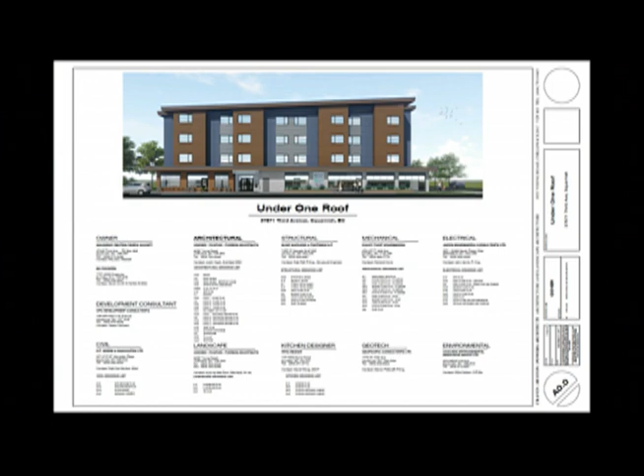Onto this site, there are related associated social services that these presenters will speak more to. Above that is social housing, ranging from core needs housing to transitional housing, and at the top is some affordable independent living. The site is being maximized to support and accommodate the proposed uses and the co-location of these social services, so there is no on-site parking on this project. However, the existing emergency shelter is kitty-corner to this site, and in the short term it's proposed that parking need will be met on that site.

There is a portion of the stormwater detention pond that's right at the corner and under part of the building footprint, so the plan is for that to be filled in, and that's being addressed through engineering. This is an institutional project, so it's not subject to a DP.

However, staff would like ADP comments. Due to the nature of this project, we are looking for comments that will result in improving the project, but hopefully not a significant cost increase. So finally, staff is seeking comments and not a formal recommendation today. And with that, I will pass it over.

As she described, we are maximizing the site. The proposed building is shown here in red, and this outline is the extent of our property. It is facing 3rd Ave, with the back facing the slough. The different shelter units face both front and back, so they have a view of the street and a view of the open water behind it. Main Street is to the north.

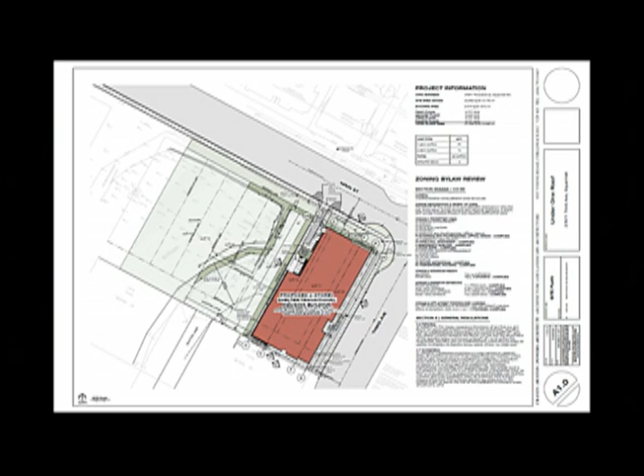To the rear of the site is the existing slough, and we're working with Civil to have them fill that in so we can develop on the first three portions of that lot.

The programming of the building: there's a food bank at the street corner, so they have pedestrian access, and the seating area can be used by the public as well.

There's a laundry facility which would include a donation center. There's indoor bicycle storage for the tenants as well as for staff, and there's a multi-purpose meeting space. All that is fronting the street.

To the rear of the building, facing the slough, there's a dining hall for the residents and for the public looking for food services.

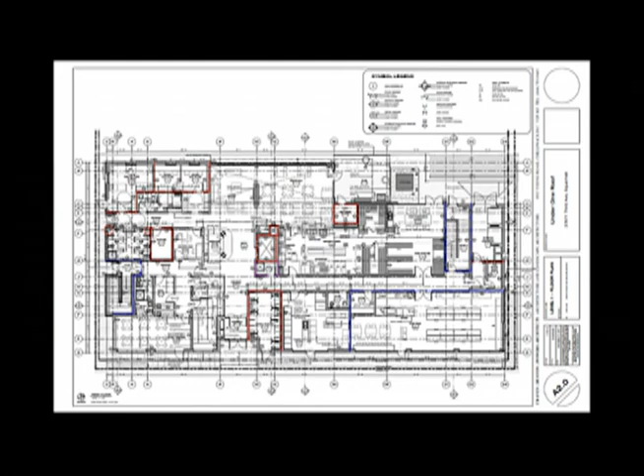On this floor as well is 8 beds for emergency shelter, and the upper stories are the transitional housing. So as people move up in the building, they're moving up in life, with different finishes and such going upwards.

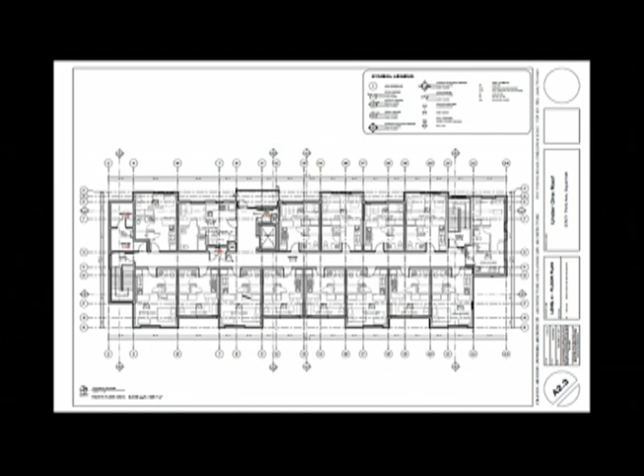Layout: it's mostly 1 beds, but there's also double occupancy suites with 2 beds, as well as handicap units.

For the elevations, the form and character of the building, we're using durable materials such as fiber cement and wood-look panels, architectural concrete, so it will withstand time. And with the wood look, it kind of speaks to the area as well.

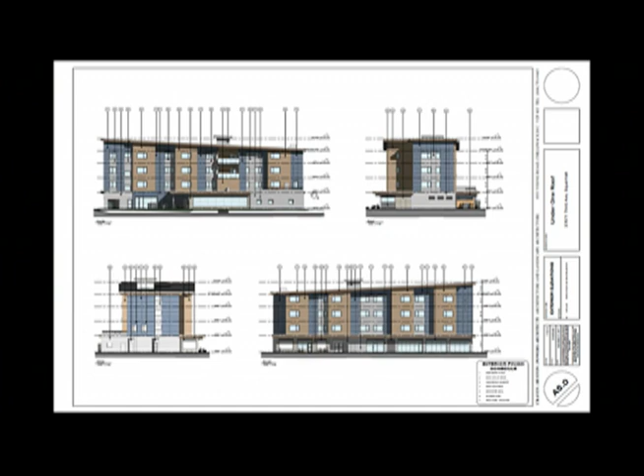For signage, we've included the main entrance with some corrugated metal signifying 'under one roof' and the food bank grocery. There will also be signage showing the different donors and partners involved in this project.

The ground floor is all concrete as well, just because of the commercial and mercantile nature of it. So it's a concrete first floor and three stories of wood frame above. That's it.

Some of the other things we tried: that concrete plinth needs a 2-hour separation to the floors above, so we did play with vaulting it on the back, but both for economy and fire rating, it needs to remain flat as we're showing there.

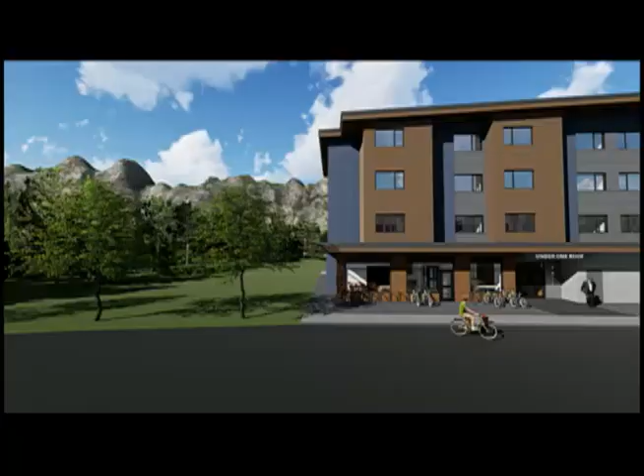There's cast-in-place concrete on the front here, architectural cast-in-place in light gray, and other parts of that concrete we're facing with faux wood cement board. In the rear of the building, there are also outdoor patios for the residents and a patio to the side for the staff.

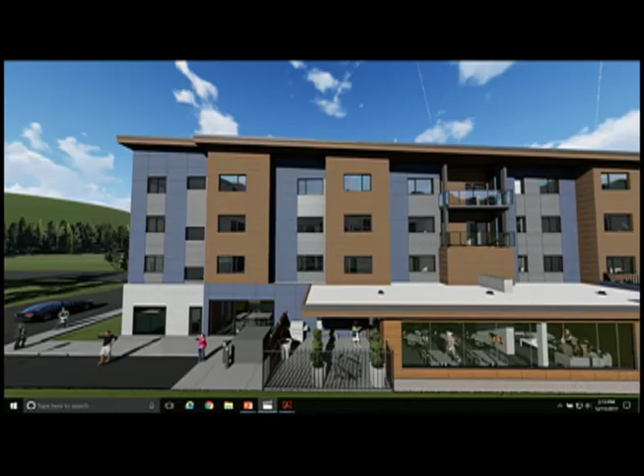Yes, that's a view to the back there. We have an unfortunate location for a transformer, but we're pretty pressed on where it can go. To the left, we just passed the outdoor patio facing south onto the beautiful water feature behind us.

We've been moving fast on this, progressing working drawings along. As you can see, this is a working drawing set. We are at a good point and really happy to hear comments and feedback. We're starting to fine-tune the exterior of this building, so we'll open it up to comments and any suggestions, and we're here to answer any questions.

Do you have a landscape consultant? Yeah, we do. We're going to bring Kyung, our landscape architect, along, but since the entire site is a building, the amount of landscape is quite limited. On the north side, we've been working with Cascadia for the environmental riparian area - everything north of this assumed property line is riparian replanting. They are allowing us to do some planter boxes within that, calling it agricultural within the replanting plan, so there's a crushed rock path and some planter boxes back there. The remainder - just the front corner - is really all we have left to work with for plants, to populate that front corner.

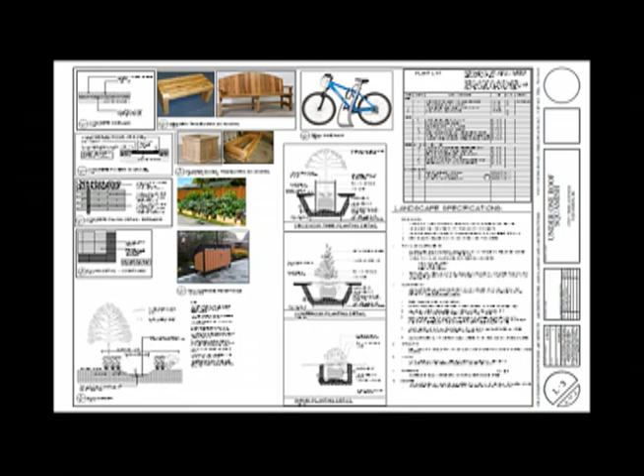Last question - is there a sign permit required for the signage being proposed? Yeah, we do sign permits, usually at the point when the project is ready for signage. Thank you. Okay, Cheryl? No questions.

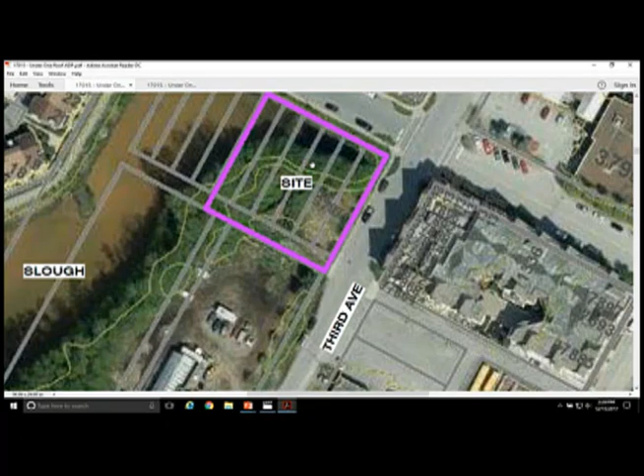What was in the site plan, what was the restriction on your property? It looks like you've chewed into some of those sliver lots there. Was it size-wise and height-wise, what was the limiting factor on how much property we could use? It looks like you're just filling in, so why not? For the zoning? No, because the city owns all those properties, right?

Right, yeah, it was the riparian trade-off - the amount of land needed to swap for the slough being filled in, that kind of dictated how much had to be... I guess not dedicated, it's the city's property, and that's what established our property line there. We did, because we're so limited on outdoor space, ask our environmental consultant how much we could sneak towards the slough and make use of that. But basically, the more we go in that direction, the stiffer we are on other land that needs to be traded off. So that line was provided to us as kind of our faux property line to work on.

If I may add to that - the portion being filled in is mostly a stormwater pond, it's like a two-step stormwater management system. So if you go by there, it's actually the black water pond that's being filled in, and there's going to be some infrastructure that goes into it to maintain and improve the stormwater management function. Okay.

That's all my questions.

Curious about staff parking, is that expected to be on the street? In front of the building, for the most part, staff is expected to bicycle. It's on the street, kitty-corner on the existing Helping Hands property where there are existing parking stalls. Once they move over here, that's where staff and visitors and such will go.

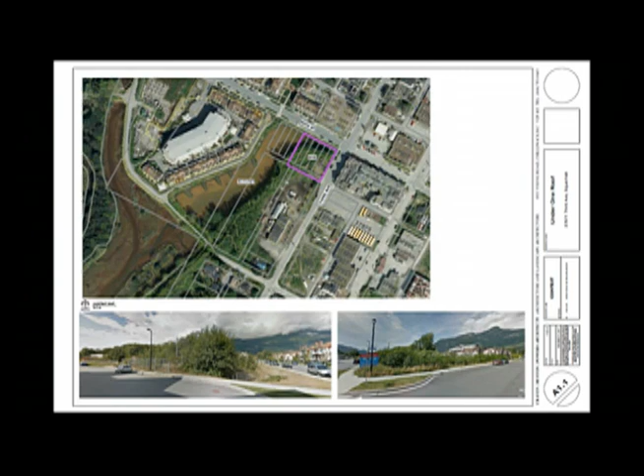And the riparian area to the west, I guess, because there's a bit of a wedge of land there, you're filling in on the corner, but there's quite a bit of land to the west. Is that all a no-touch zone, just based on the calculation, no trade-offs about that? Yeah, I mean, I think it's a trade-off, both land and quality of plantings and such. So we've pushed to head in that direction, and the line was kind of set for us. Yep, okay.

And there are no street trees on Third. Why is that? We're still resolving Third Avenue a little bit, so the plan in the active transportation plan is to have a separated bike lane that goes the full length of Third Avenue. The building is set back about 1.5 or 1.8 meters from the property line, and because we haven't yet installed this separated bike lane, we're still figuring out how it's going to work with existing buildings and new buildings and all the rest of it.

When the street design is figured out, would the city come back and include street trees if that was part of the overall design? No, I think we're going to try to figure that out as part of this process. Okay, that's it for me.

What's happening with the existing Helping Hands property? Does that stay owned by the district? And is that staying that use, short term? It's staying, the ownership is going to stay the same. The use in terms of immediate future will be for accommodating parking on that site for the new development, and we're not sure what's happening with that afterwards.

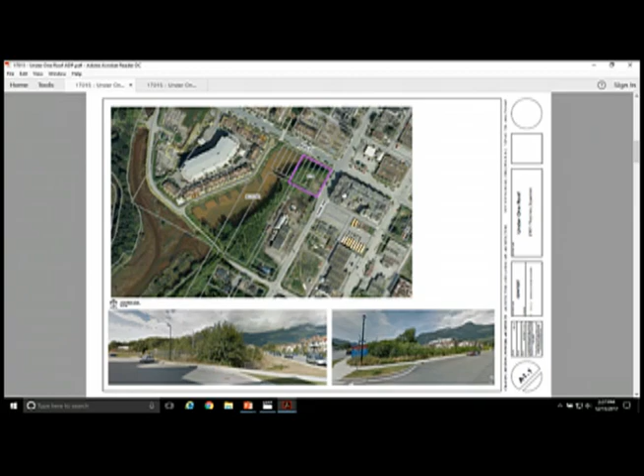Can you clarify for me which elevation is the Main Street elevation? The directions are a bit confusing for me. Is it the north east? Sorry, Main Street is this side. The bottom right here? No, that's Third. Oh, I'm sorry, Main Street, north and south. It's going to be that one, two labeled. So the long one's Third Ave. I want the short one, the one with the signage. It's this one, yeah. Okay, so that's Main Street there.

Because we don't have circulation, that is our loading, our garbage, which we've added some windows to articulate a little bit. And that'll be landscaped, so it won't be an exposed concrete wall. Okay, like was kind of shown in the 3D. Yeah, that's a better approach, yeah.

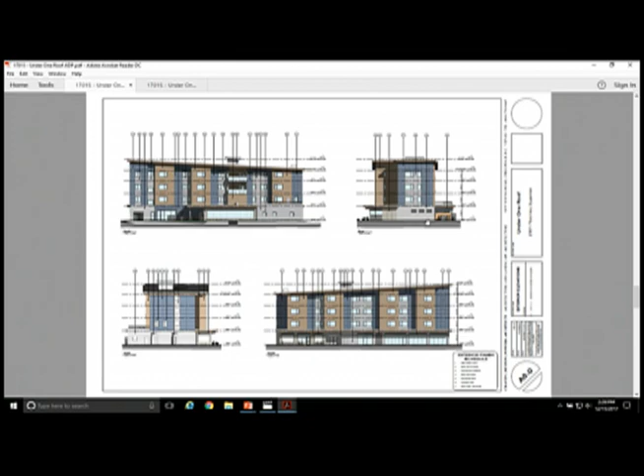Okay, that's it for me. Okay.

Just carry into comments. Sarah, do you have any comments? I'm pleased to see that there's accessible units on each floor. Thank you very much. Sorry, I just didn't hear what you said. Oh, I just said thank you to them for showing accessible units on each floor.

My comments are really just around the kitchen on the 4th floor accessible apartment. You should have a cooktop that can be used under, the sink should be able to be used under, a wall oven for the accessible unit for sure. Fridge with the freezer on the bottom, make sure the controls are at 1200 millimeters above the floor. Otherwise it looks great.

Also the countertop serving the cafe, if it can be at table height rather than counter height, so that it's easier to get along with it. Yeah, so the serving window. Beautiful, that's it, thanks.

Thanks. Just one comment, and that's just, I think you've done a really good job making the building look nice given the budget constraints and all of the programming you have put on the ground floor. So I'm glad to see this project moving forward, and I don't really have any comments on the design again.

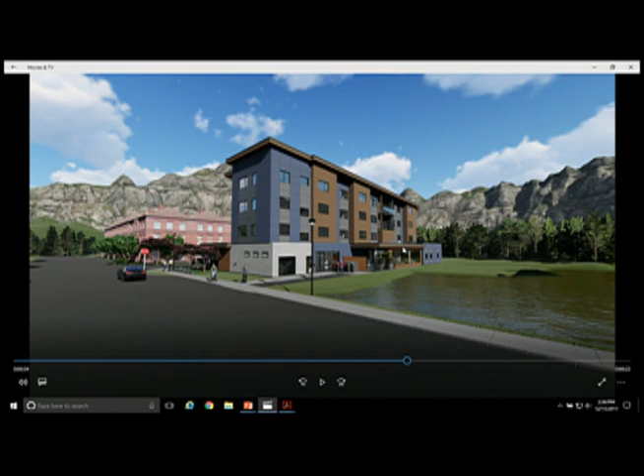For a limited budget, I think it's good. I like how much glazing you have on the main floor - as Wayne said, it opens it up and invites the public in. I don't know what other changes you could make that would make a big difference within the budget you'd have to work with.

I do agree with Cheryl - maybe some of these lower roofs could become outdoor space, and then you don't have to utilize a north-facing patio. But overall, I think it's fine.

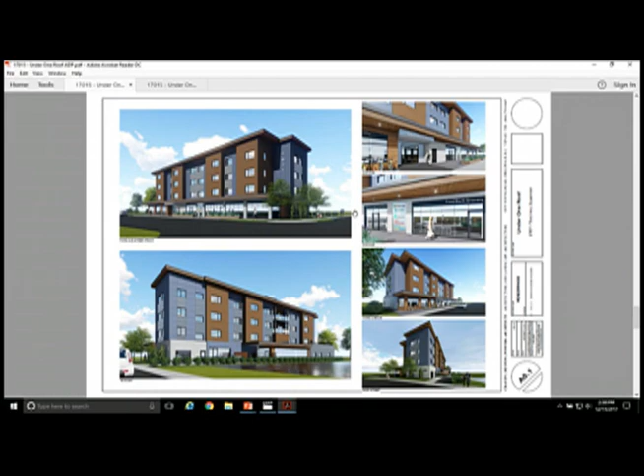My comment might just be on that east wall - a little more treatment, because that's going to be the key end wall everyone sees driving down 3rd. There was also a comment on activating the kitchen or eating area in the front corner. It might be nice to have a garage door that opens up and animates that street corner, or possibly double doors - I only see single doors along that whole frontage. Maybe there's double doors or garage doors that open right up in the summer.

Maybe out of the cafe, to be able to open up. You're talking about the left side of the food bank where there's a cafe eating area? Yeah, yeah, it's funky. Those are my two comments.

I think where I'd usually focus on added commercial viability of a building, you already know exactly what you need to do in this space and you're taking care of it exactly the way it needs to work. All I can say is how excited I am to see this come to the community, and what a great location for it too. Everything else about it looks pretty fantastic to me.

I would agree totally with John. I hope to see this move forward - it's nice that the district is helping make this happen quickly, as I know a lot of these spaces and services are very much needed here. Overall the form has been executed very well given the limited budget constraints you're dealing with. If there's anything for me to suggest, the comment about garage doors is a really good one for increasing interaction between the street and making it visible for people inside and vice versa. And if there's any chance of increasing the size of the glazing, even breaking it up somewhat, because natural light is so important for people's well-being, especially given that for a long period of time in Squamish we lack it.

Okay, so this is DP 473. We're right on the edge of the Northyards neighborhood. Very briefly, this whole block was zoned RS3 and RS2, and then the district did a mixed-use rezoning to create the MUD 1 zone, and that was this year. So this is the first of several developments we'll likely be seeing in the coming years for this block. And I just wanted to point out that there are 3 variances.

They're all quite minor in the eyes of staff. The first one is to increase height, basically to allow for this entry tower that goes up the length of the building and the butterfly roof design, and staff are supportive of that variance. The second variance is a very small side setback due to a slight encroachment for the parkade. The third variance is to reduce the off-street loading from 3 spaces down to 1 space, and again that's supported by staff. We feel there'll be shared loading and that the office is likely to have low demand on the loading space.

So just to summarize, in the eyes of staff, they're meeting all of the DP guidelines, the DP Area 6 industrial park guidelines, so staff's conclusion is that these have been met. We are looking for ADP's comments in relation to the site plan, accessibility, circulation and layout, as well as the architectural design, form and massing and articulation, the materials, and the landscape plan. So I'll pass it along to the architect to present in more detail.

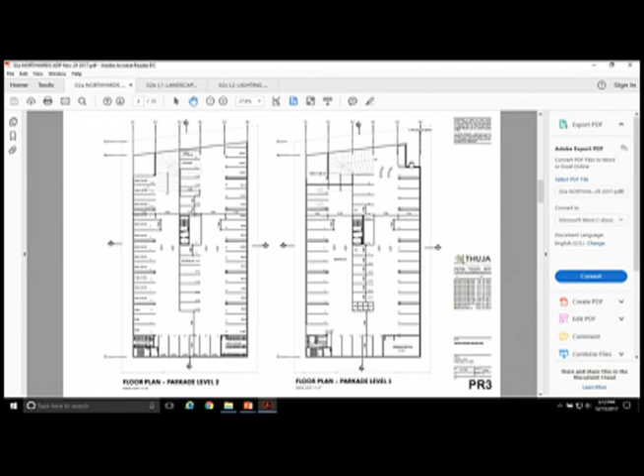We've provided a mix of studio to 2-bedroom units, each with private decks. The 5th floor units are a little bit smaller. They pull it back to have the upper floor, the 5th level, step back, so it's not a heavy building, and that also allows for some potted landscape up on that top floor.

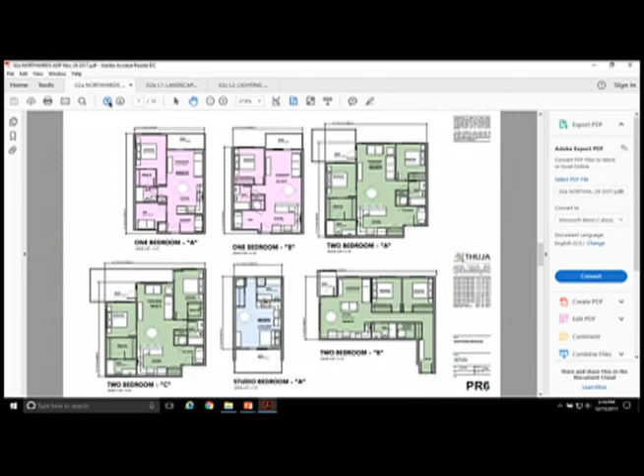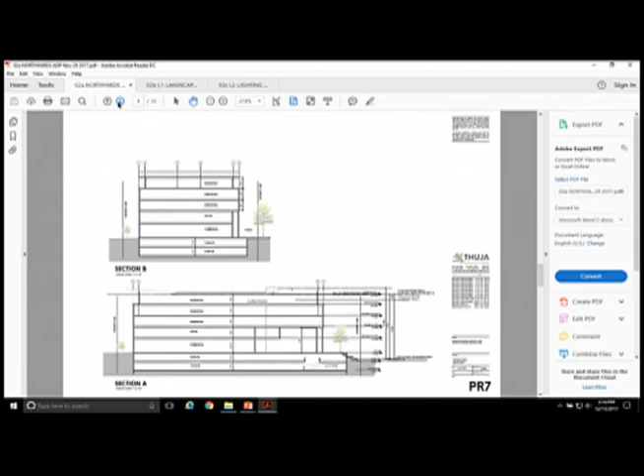So the south and west portions of the building are pushed right to the setbacks. If you scroll back to the main floor here, envision how these would set up for tenants, they're exiting out the backs of these units. So this space doesn't set up for heavy glazing, it's more of a utility type of space in the back of these units, with exiting along the back. We also have a separation with our lot line, we can only have a certain amount of glazing, so we're maximizing glazing in the office space, and then we don't see a need for heavy glazing along those 2 facades.

Some renderings of the project. So the stairs coming up are quite a challenge, if you can imagine trying to stair and ramp up almost a full story in such a short width of land. We were trying to push our stairs out towards Government Road and sort of grab pedestrians coming along. There'll be new sidewalks and things, so it's going to change the look of that street. We wanted it to be not just a switchback of stairs up to this commercial area, we wanted it to be a place where people could hang out. There's going to be landscape planters and benches amongst those stairs and ramps, so people can sit there and have their coffee, what have you.

And then the same happening in this common courtyard area. People can put their benches or their wares, tables out depending on the tenants we're going to have. And then we have these built-in concrete benches amongst planting areas, which Laura Lynn can speak to.

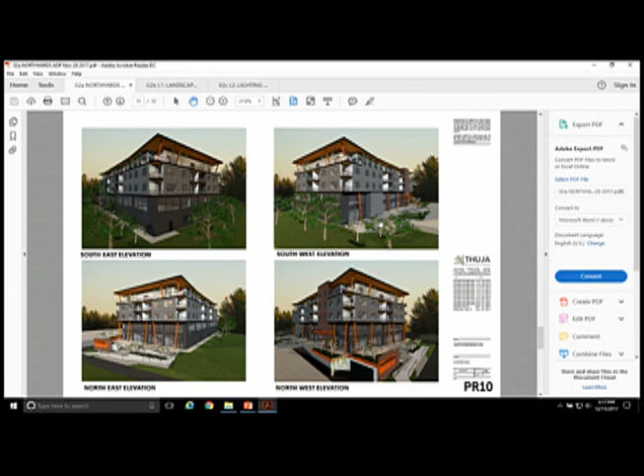We did a quick shadow study, pointing out that in high usage times of day—lunchtime and the end of the workday—those two plazas are getting sunlight. In the middle of the day, and then at the end of the day on those steps, they'll be an interesting place to hang out.

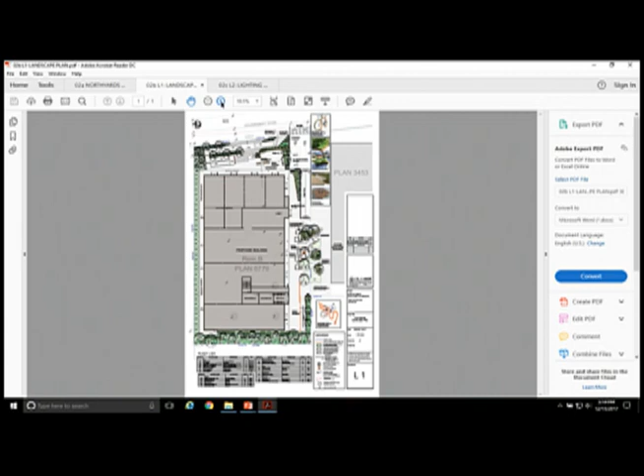So my name is Laurelyn Swizzo. I'm the landscape architect for this project. Some of you might know me—I worked in Whistler for one of your local landscape architects, Tom Barrett, for 15 years or so, and have recently moved further north, so I wasn't able to be there, but thanks for letting me call in.

I guess she sort of touched on some of the landscape already. I'm sure you guys will have a couple questions, but maybe I'll just do a quick summary.

So we've got the front entry, where we've got quite a series of ramps and stairs, and I'm fitting in some tiers of landscape areas. It's going to be quite shady over there, so lots of native ferns and shade-loving plants, as well as much evergreen material as I can to keep it green most of the year if possible. Some smaller deciduous trees out front, and I think I'll add some nice flowers in the spring and summer.

Did you have a plant photo board, a picture board there? Yeah, so you can kind of refer to some of those pictures to get an idea of the plant material.

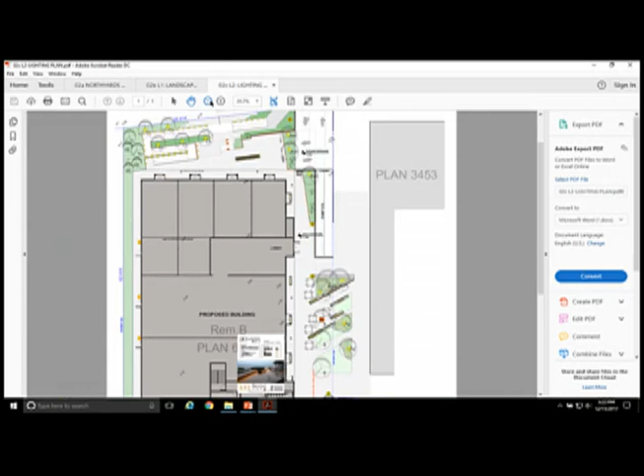And we've got a bunch of bench-type seats in there, and we've tried to add some creative lighting so that in the time of year where you don't get as much sun, it's still an inviting place. There's lots of opportunity for movable furniture, or if you don't have furniture, there's still lots of opportunities for seating.

We've got quite a few bike racks because Squamish is bike central, so we've got some at the very back, but still quite visible to the whole plaza, so I don't think it's going to be a problem putting your bike there and worrying about somebody snatching it. And then up front we've got a couple more bike racks in the front little plaza—but if you're just stopping quickly, maybe you just want to keep your bike there and run into the shop.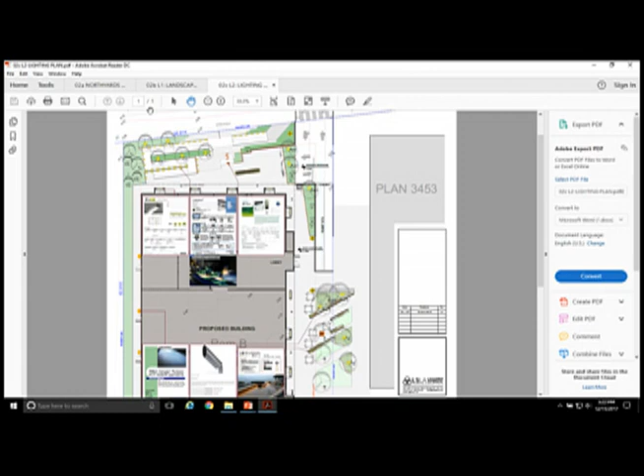The back area, we've got quite a drop right now if we look from the level of the plaza down to the existing grade, but as I understand, this may be coming up with other developments possibly to the south, so that area might end up getting filled in. But in case that doesn't happen, we've got a nice buffer of native-like plants, some trees to help shade the building in the summer, and then they'll lose their leaves and help warm the building in the winter.

And we kept a buffer on the west side as well, so that would be below the railing and walkway. It's an evergreen shrub that gets up about 2-3 meters or so, and I think that'll be nice screening for that side of the building.

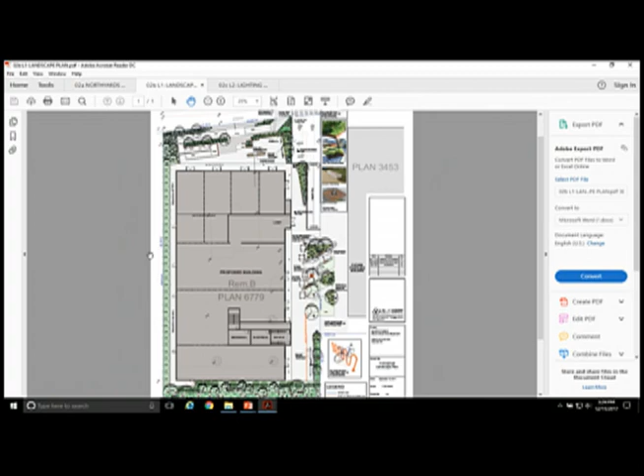Thanks, Laura, we'll do questions in a bit. If I may add to the presentation, since the district drove the zoning earlier this year, I want to give the ADP context on the overall set of properties. The MUD 1 zone uses a three-tier approach, going quite industrial with some residential at the south end near Pioneer Way, then more light industrial, then more neighborhood commercial at the north end. This side is along Government Road, so the focus there is more commercial and office rather than light industrial.

Okay, thank you, we'll start with questions. I can start. Thanks for the presentation, Dennis. Do you have a traffic study on this area? We did, yes, it was required by the district.

I noticed all the photos are kind of old. There's been some recent road upgrades the district did, active transportation in that area. Was that considered in the traffic study? Yeah, okay.

What considerations have been made for the neighboring property that's a dog kennel or dog training facility? It's noisy, and the train is noisy as well. Is there anything special? I can speak to that - that site's been purchased by a developer and is in the process of coming forward with a very similar development. Okay, and what about the train? There are many properties around here that complain constantly about the train.

I can speak to that, because I was involved in this rezoning process. The property closest to the train tracks has zoning requirements for certain design features along that western property line, such as thicker windows and other considerations. But it doesn't extend past that first property. Okay, unfortunate.

And then just the parking count - it looks like you meet parking, but there's quite a consideration on motorcycle parking, there's 6 of 12. Can you explain that? It looks like you meet it, but there's a lot of motorcycle parking - it's like half. Maybe Asia can speak to that. Yeah, our zoning bylaw does allow motorcycle parking spaces to count as car parking stalls, so 2 motorcycle spaces equivalent to, I think, up to 5%. There is a limit, obviously. Yes, so they're at that limit.

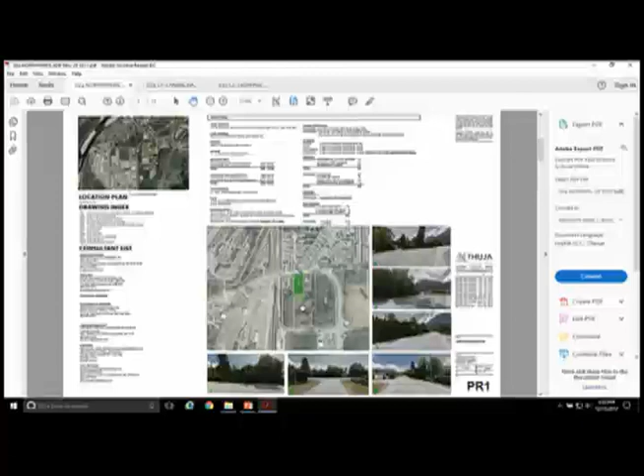Building on that, between the two sites currently actively developing, we're trying to coordinate, and their architects are working together to put some pedestrian connectivity between the two properties. They are talking to each other to try to design and facilitate that connection, and staff is trying to facilitate that too. So we're working with what we have in the current situation. The largest property, the one in the middle, and the adjacent one are both owned by the same owner, and they're trying to consolidate to create a larger parcel that's more in line. Hopefully if that has a positive outcome, it will add to it as well.

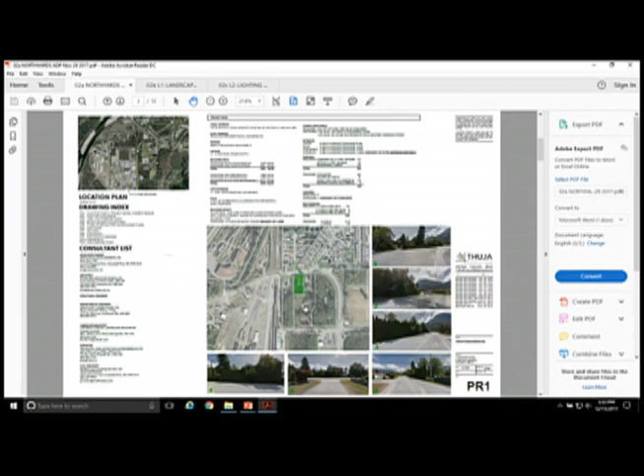Maybe to staff, if second floor commercial doesn't survive, can they convert that second floor to residential? That's a good theoretical question. I think we'd have to revisit that if that's the case, but at this point, the zoning would require non-residential uses.

Has the applicant considered a shared ramp to the adjoining property down the parking garage ramp? Yes, the developer also owns this property here, and this will be a shared access between these two properties.

The decks aren't shown in the building sections, correct? No.

On the upper deck facing north, you show trees. What provisions will be in the building to have those trees there? Maybe Laura Lynn can speak to that. That upper floor terrace facing north, what provisions are there for the trees shown in the architectural but not shown on landscape? I think obviously structural will have to take the load of soil up there, but I see it being raised planters, maybe 1.2 meters square, and then have something smaller, probably a flowering crab apple or a variety without fruit so it doesn't make a mess, or possibly a small pine in those raised planters. That would probably be the solution if they want larger material up there.

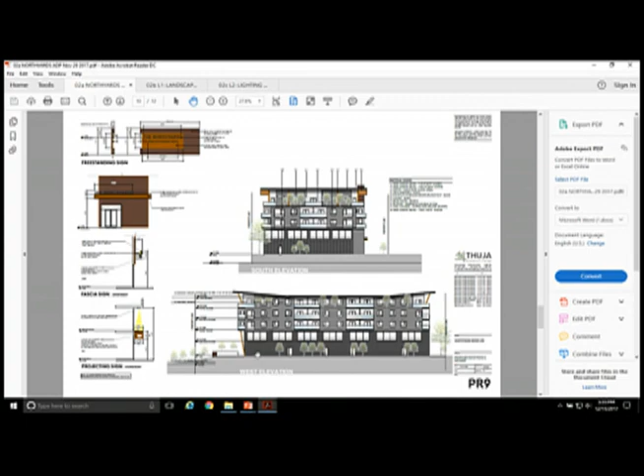Is there a street tree, or is there intention at the municipal level for a street tree for that road? I'm not showing any street trees at the street level, but I do have a dogwood tree, and because there are actually two tiers, if you refer to my plan, I think that will give a nice effect because the sidewalk is so close to the ramp, along that part of the street. I can look at putting another tree on the east side—I've got space for another small tree, but they would have to be smaller scale trees along there.

I like the beginning of the ramp and the stair system, but that kind of falls apart at the top. Did you ever explore continuing the ramp to the east on the top leg so that those using the ramp don't get dumped out in the corner there, but maybe are closer to the entry and the larger space in the front plaza?

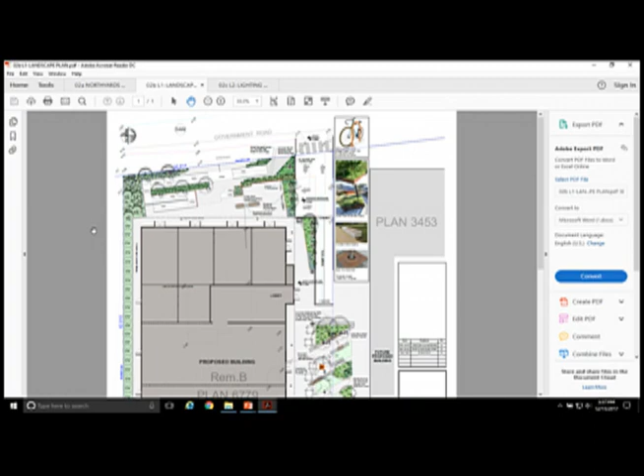Kenneth, do you want to speak to how you're stepping up or down the parkade to accommodate the ramp? The parkade goes to the property line, so it's under that upper plaza. With the district, anything over 4 feet has to be behind that setback line. So as the stairs and ramp go up, our parkade ramps down, creating a height restriction. We could change the ramp to a straight dog-leg back and forth, but we wanted to create something more usable instead of just a boring ramp beside the building. No, I agree.

Laura Lynn, there's one plant on your plant list, TM, on the plan that's not on the plant list. Is that Mertensiana? Yeah, the mountain hemlock. Glad to see somebody else does that too. Okay, that's the end of my question.

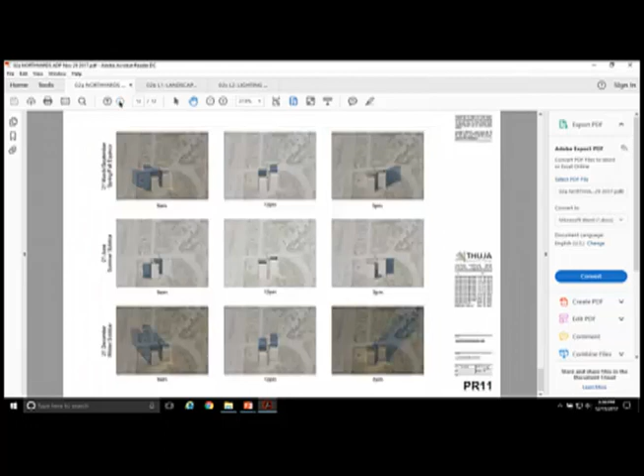In the shadow study, there are 2 buildings. What's the second building? The second building is owned by this developer, who will be developing the adjacent property as well. So we've just flipped a similar building to look at adjacency and how that courtyard will receive sunlight, just to give a comparable. Is it the intent to do a duplicate building, design-wise, size-wise? I don't know if that's really set right now.

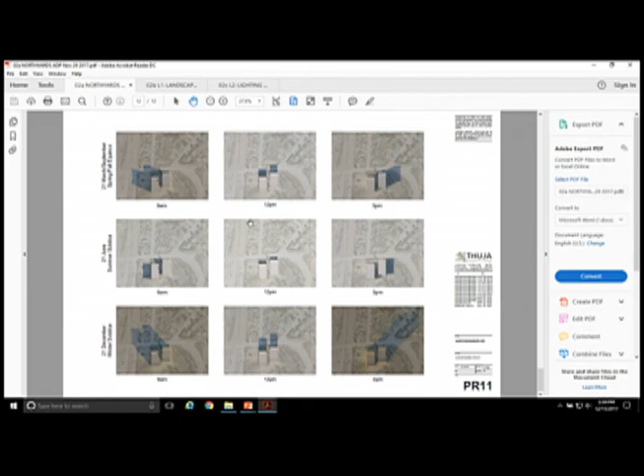Is it a wood frame building on top of? There's definitely going to be some steel on the main floor, but wood up. And are those weathering steel columns structural, are you thinking, or are they? We hope to, but we can span before that span, so they don't need to be structural.

Can you clarify, I'm a little familiar with the zoning, but maybe for everyone else, the height increase of that over-height shed roof and how that relates to the bylaws? Yep, I can speak to that. The allowable height is actually 16 meters, and if they're able to do a higher energy efficiency construction, they get a height density bonus of 1.5 meters for anything within the floodplain, so 16 meters becomes 17.5 meters. There's a different height bonus the developer did aim for tied to the provision of over-height industrial bays, but that wasn't obtained—that's part of the MUD 1 zoning, and it's not what's being put into place in this development, so they weren't able to qualify for that additional height bonus. So from 17.5 to 19.23, am I reading that wrong? To the 23.7 meter? Oh, that's overall, geodetic, sorry. No, that's okay, I just missed the dimension.

I like the treatment of the west side where you've got some brick. Where is it? Yeah, sorry, the northwest elevation, which is the west. The east elevation, sorry, there. You've got brick and it speaks to the sign that you got in the front on the north, but then there is no—most people would be seeing that road frontage along with Government.

So a way to pick up some brick on your sign that you've obviously got on the east elevation, to bring it onto the north elevation as well, that everyone is going to see. So you add more brick onto this elevation? Yeah, it looks like you've added brick to bring in the sign on that east elevation, the ability to bring it on the north elevation as well. So we have the sign at road here, which is brick, but we wanted to define the residential entry in a different material.

And street frontage hasn't been sorted out with the district, like the bike lane, 3-meter bike lane? There'll be a separated bike lane along there. I'm not 100% sure of the frontage, but our engineers have communicated with the applicant's engineer too.

That's all my comments. John? Where do I start? I'm going to make a comment, but I'm hoping my colleagues here will take it to a next level. Just the street front—to me the massing over the street, in consideration with the neighborhood nearby, I find it really heavy. I would prefer to see some setback and articulation there so that more light can come through and so it's not so looming over the street. The north elevation? Yeah, it is set back quite a ways. Yeah, floor to floor as you go up the building.

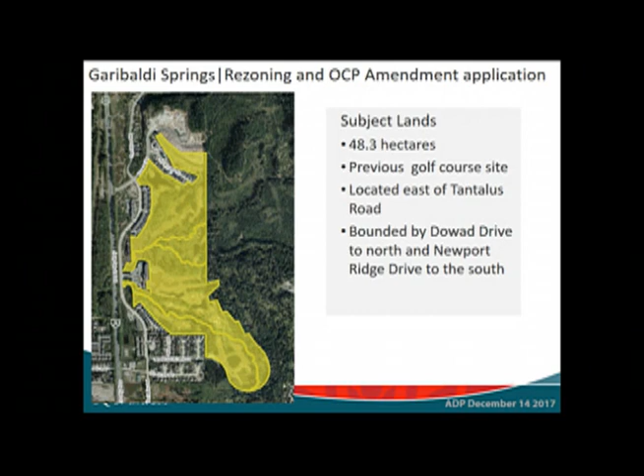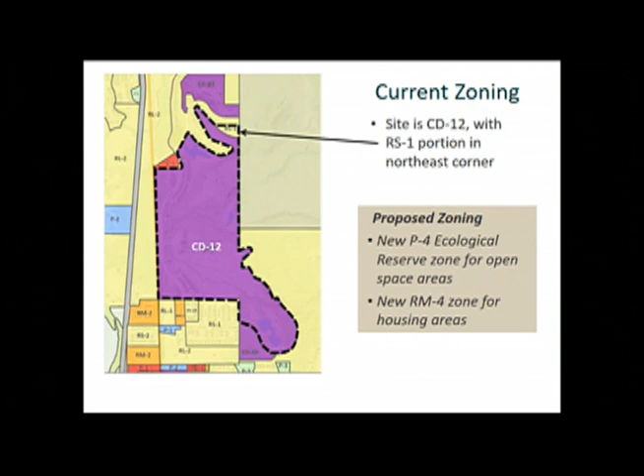It's a 48-hectare previous golf course site on Tantalus Road. The current OCP designates this site as Greenway Corridors and Recreation, and the proposed OCP amendment is for the residential parcels within the golf course site to be redesignated as residential. The current zoning is CD12, and the proposed zoning is a mix of ecological reserve for the open space areas and a new RM4 zone, which would be created for the housing parcels.

At the October 19th meeting, the ADP made a number of recommendations, including more mixed housing forms, including some single-level adaptable suites, which have been brought forward - the applicants will bring you some plans in a couple of minutes to show what these look like. There were recommendations regarding the road system, and the applicants have responded by establishing a hierarchy with internal collector roads, eliminating the north-south collector road, providing a new access off Tantalus for improved east-west access, and additional pull-off parking on the collector roads. The other ADP comment was the need for local commercial.

There is possible opportunity for expansion of commercial use at the clubhouse building, and there is also opportunity on land that is to be dedicated to the district, just under an acre, on Newport Ridge Drive.

Another suggestion from the ADP was that the pedestrian routes be more clearly identified on the collector roads, hard surfaced and lit, and this has now been provided. Paths through the neighborhoods themselves will be more clearly distinguished, which will be brought forward at the development permit stage for each phase.

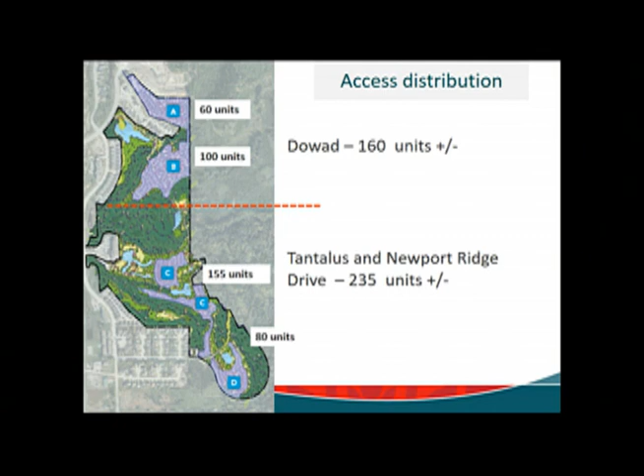Sorry, I just lost my space here. My arrows. Here we are.

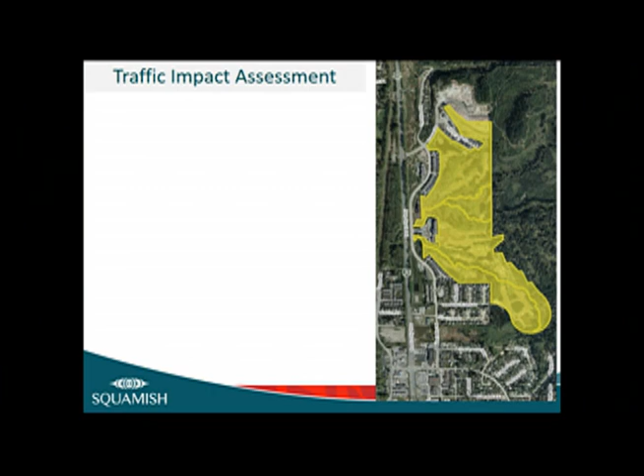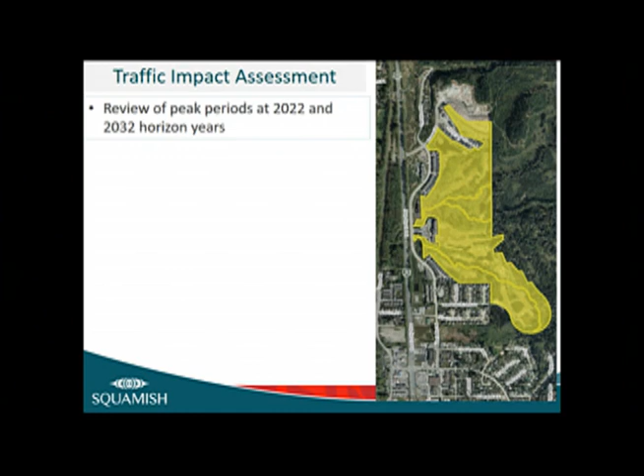The other thing we have been doing since the previous meeting is looking at the overall traffic impacts. There is a traffic impact assessment being done that looks at the peak future periods, 2022 being the build-out year, and 2032 being 10 years beyond that horizon year.

The traffic impact assessment is looking at a number of short-term traffic strategies focused on Highway 99 improvements that can be done in the short term, one of which is a right-in, right-out at Newport Ridge Drive, and the second is possible traffic laning, signaling, and control modifications at Garibaldi Way. As everyone knows, that's a terrible place to turn left.

The main traffic movement issue is how to get people southbound. The framework we're working within is that the Ministry of Transportation and Infrastructure, the province basically, really wants to limit any future points of access to the highway, any future signalization. So the things we've been wrestling with on this project are what their contribution to the traffic generated will be, and what their contribution to the solutions should be.

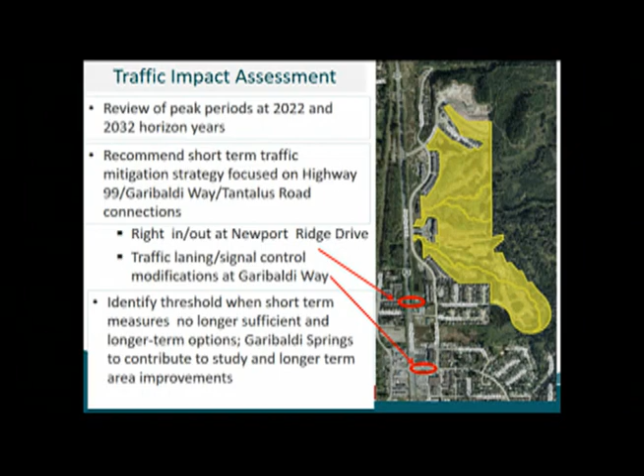The Garibaldi Springs development is one of a number of developments planned on the east side of the highway. As part of this traffic study, we've advised their traffic consultants that we need them to identify the threshold when these short-term measures are no longer sufficient, and what the longer-term options might be, and what the Garibaldi Springs development's contribution should be. So even though Garibaldi Springs may not be making the actual longer-term improvements, by the time the zoning process is through, we'll have something in place so they'll be making a financial or other form of contribution to the bigger traffic issues in this area in general.

That's the end of my presentation, and I will just turn it over to Polygon. Kevin Shoemaker is here, who will show you a bit more closely what improvements they have proposed.

That is one of the longer-term solutions that's being looked at. I'll just pull up this drawing if I can get back to it.

Especially considering the long-term connectivity to the highlands from there, traffic consultants are certainly aware of that. Let me get a map back in front of us here. There are a number of challenges in doing a flyover here, one of which is the spacing to the rail tracks. That is one of the longer-term solutions they're looking at. There are 5 or 6 longer-term solutions, that being one of them.

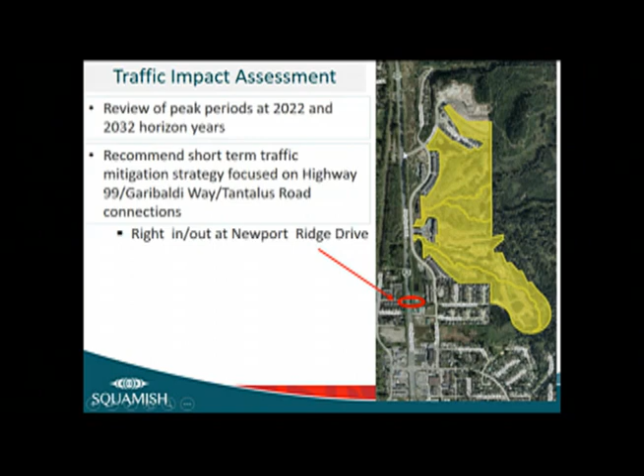Doing one of those oddball lanes on the highway where you parachute out and go into a storage lane - there's a technical term for those. Protected left? Yes, thank you. So that is also being considered.

Obviously, the flyover here to go south and get onto Government is a preferred solution, but there are real technical challenges in doing that. Also doing left turns from Newport Ridge Drive is another option, but unfortunately you're really compromised by the existing development that is there. That flyover is definitely one of the longer-term considerations that the traffic consultants are looking at.

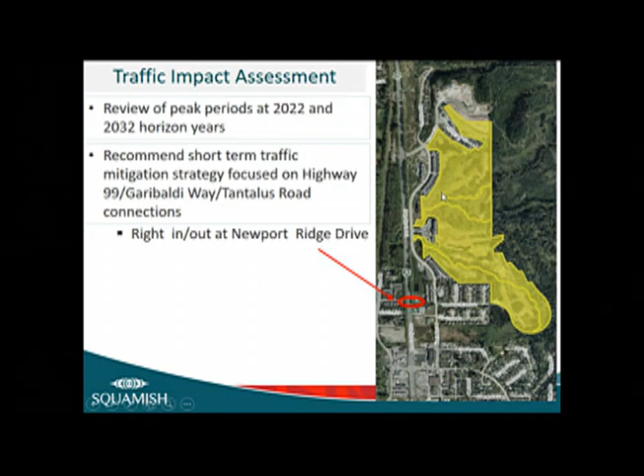Okay, so I'll just turn it over to Polygon here. I'll put their presentation up, which I think is this one? Nope. I'm going to just turn it over to Emma Hodgson, who is an expert at this. Actually, I'll start while Emma's doing that to save time.

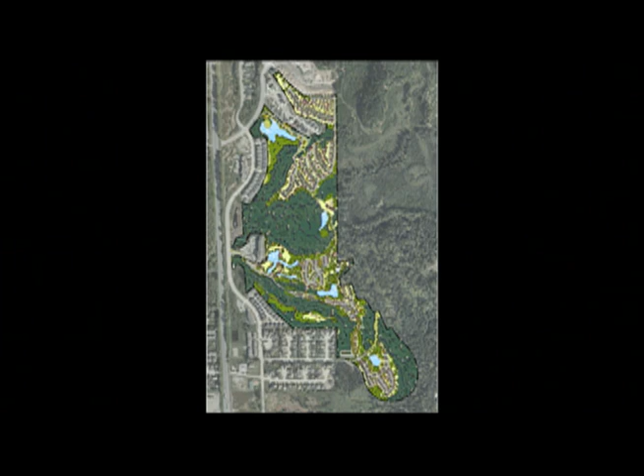So we've done a few things. It's kind of hard to see - is that showing up? No. How do I get the arrow? So on the most northerly, it's showing up here but not up there. Oh, that's frustrating. On the most northern portion of the site, next to Sky Ridge... No, so I don't know how this is. Okay, I'm sorry.

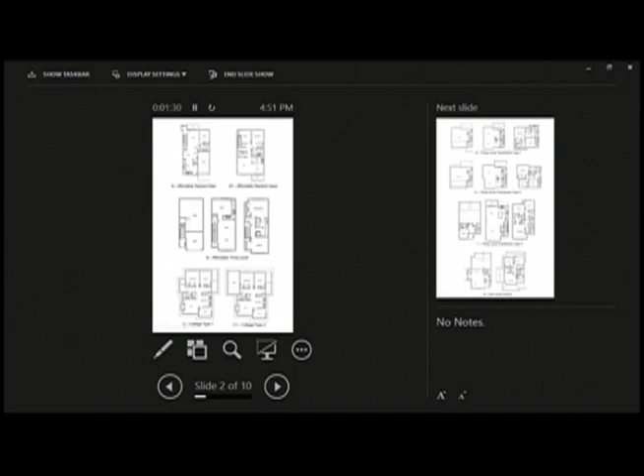That doesn't look right, you see, because it doesn't show up on the screen. Okay, then just pretend it's not happening. I'll just, because I need to point to things on the screen. Can you do it with the computer? I can't, I don't know how to do that. All right, sorry everyone. So the pocket neighborhoods, single-family cottages - how'd you do that? So pretend that there's a screen there. Okay, so your cursor's over there.

Oh, I see, okay. So here and down in this location, we have these standalone one-level cottages, which offer living on one level and grade level access, and they would be adaptable. In other words, any of the homes that we have that are grade level and one-level living, we're going to build to an adaptable standard where the hallways are the correct width, one washroom can be accessed, and if someone wanted to make it fully accessible, they could adjust the millwork. In total, we have 53 homes of that nature, where they're grade level, one-level living, the bedrooms are on the same level, and you come in at grade.

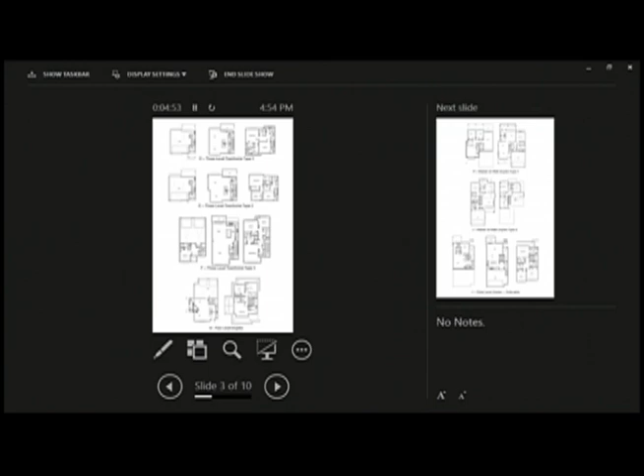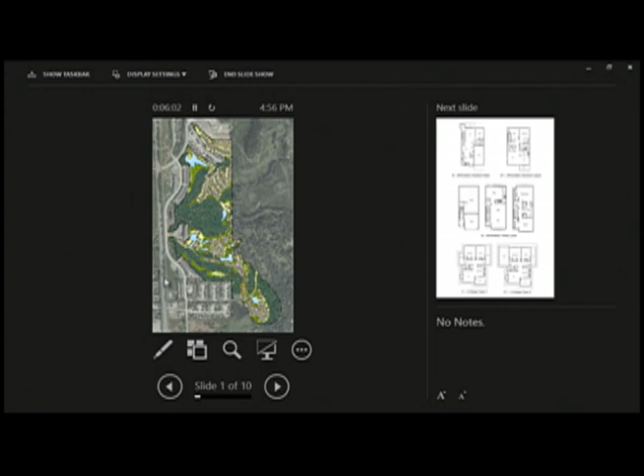With respect to the road hierarchy, we've done a few things. We reorganized the units within all of the communities to allow for what we call a collector road. There's one here, and then this one that goes right through the community connecting down to Newport and back up to Tantalus. These always have an adjacent walkway, overhead street lighting, and only ever have townhomes on one side, so they will feel more like a city street.

There's also lay-by parking in key locations on those roads, in excess of visitor parking, and publicly accessible. So if someone was riding or getting to the trails up here, there would be some lay-by parking in that location. The internal lanes are typical with townhomes on either side. And then there's the Newport dedication, but that's in the future.

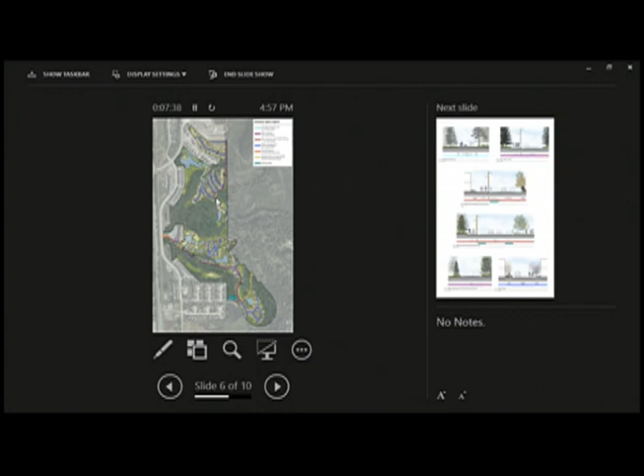So those are the two main ordering principles. I should point out this north-south road is a decision by staff. We were indifferent as to whether or not that was in or not, so the decision's been given to us and that's what we're going with. It wasn't our proposal, we designed it both ways. After many meetings since the last ADP, this decision has been made.

If I could just point out, it's still a trail connection. The decision was made that we didn't need vehicle access through there, but it is still a major trail.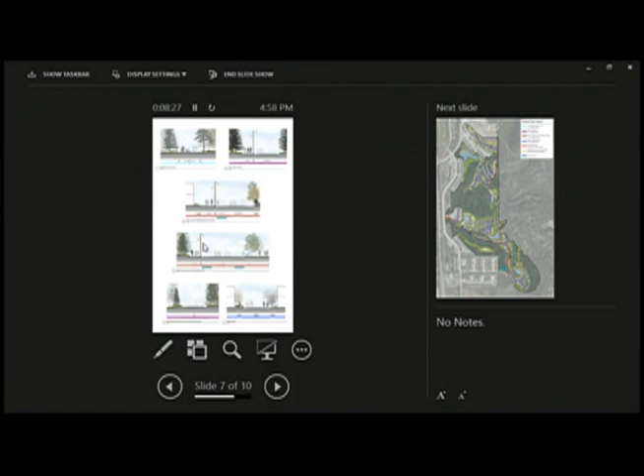The trail network: the hierarchy we have here is there's a main north-south path that is paved. This was adjacent to the road that went all the way up, but with the road being gone, it's still a connecting path, paved, lit, and 3.5 meters wide. There's also the accessible loop, which is fully accessible at grade with all the necessary features.

And within, there's what we call the multi-use, it's not quite the right term, but it's a 3 meter paved, lit, secondary path network that connects the townhome communities to these other paths and to the roads. Within the townhome communities, there are 1.5 meter paths that connect to the lanes, so you can go from your townhome to an internal path, to a multi-use path, to a main path. We're continuing to work on this hierarchy and where they connect, but we believe we've got quite a few layers here that are working quite well.

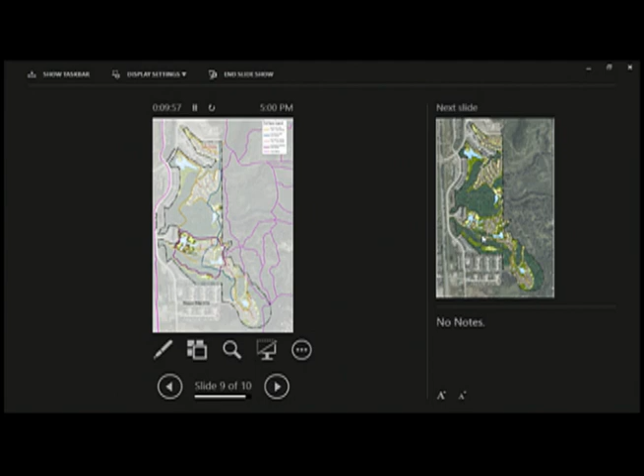So just on parking, I'm going to use this drawing to talk about that. We've added 188 parking spaces to this area around the site in a few different locations. We're redoing the cross section of Tantalus to separate the corridor path off into this green space, which will allow for parallel parking along Tantalus. In key locations on the internal collector roads, there's lay-by parking. We've created this parking lot off of Newport to the south. Those are the main additions. We lost a few spaces by creating this separate parcel for the clubhouse, but the net gain is 168 new parking spaces.

And I think those are the main points, just in the interest of time. Great, thank you. So, I guess round of questions. It's 5 o'clock. Sarah, do you want to start? No questions, perfect.